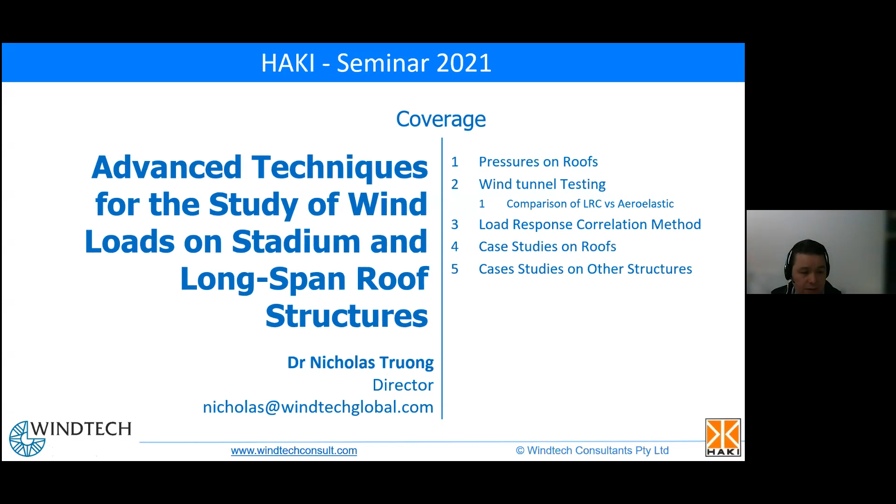All right, let's go. Sorry, that's the slide. Okay.

Okay, so pressures on roof structures. The main thing about roof structures is they can be quite complicated in terms of the pressure distribution. And one thing is that the roof pressures will fluctuate over time. This is really the reason that we need to spend a lot of time doing specialized testing using the wind tunnel.

Sorry, this is just what I was saying there. So let me move this.

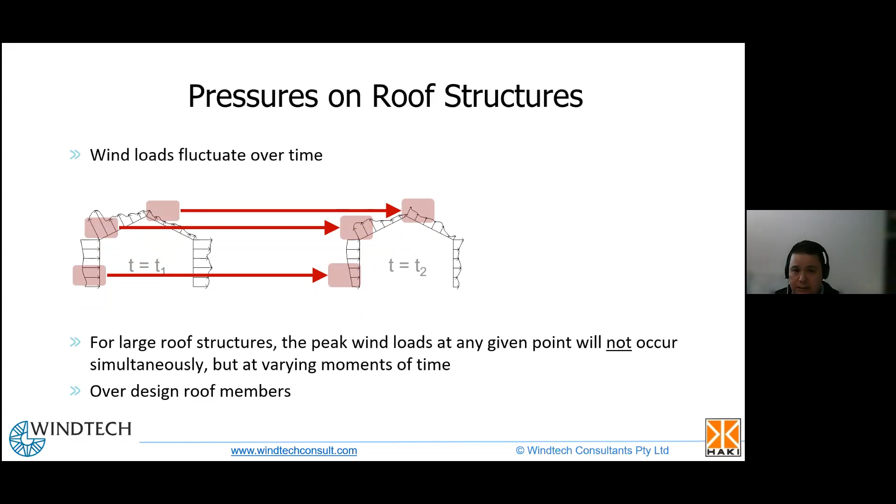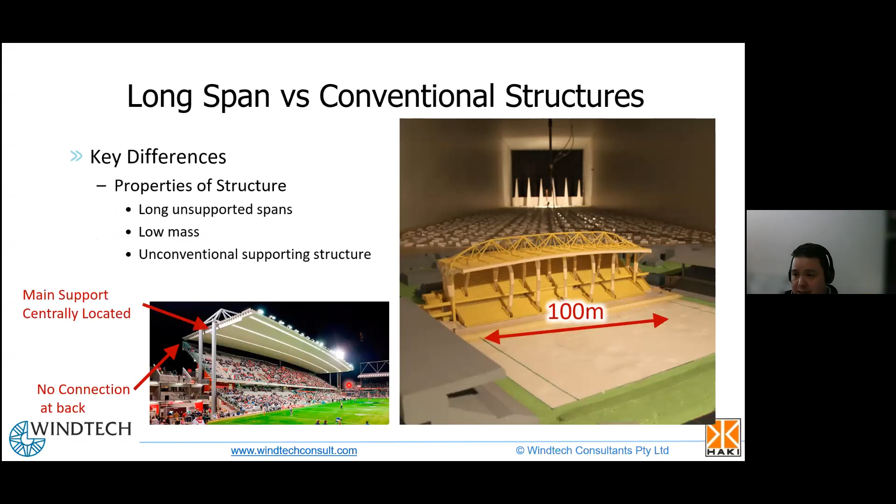In particular, this roof has only got a single main centrally supported structure here. You can see there's 2 pylons, linked up to this truss structure across the top that supports the roof. So unusually for a stadium, there's no back connection here. What this means is that the structural response of this building is quite different because we don't have a typical cantilevered roof.

And in particular, for this structure, prior to our involvement in the testing, there was a small failure, and the failure occurred at one of these joints here. This happened because the original designer of this building used a standard approach, and the standard approach doesn't include some of these interesting structural responses.

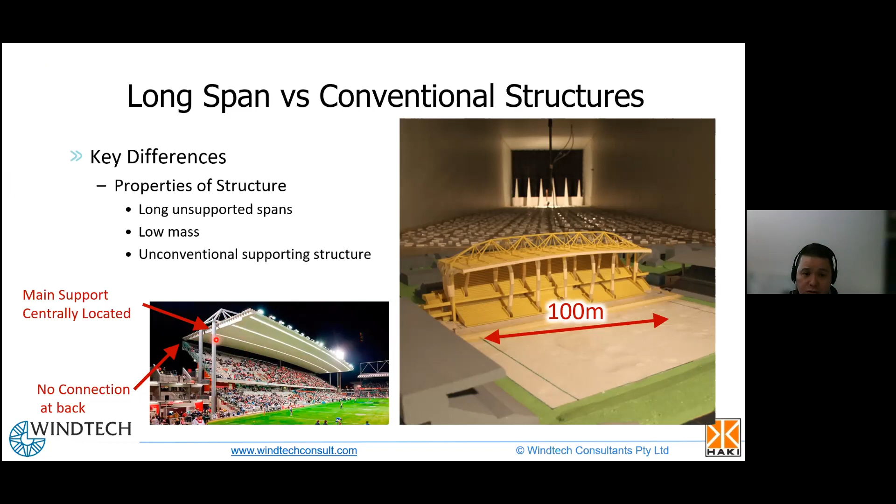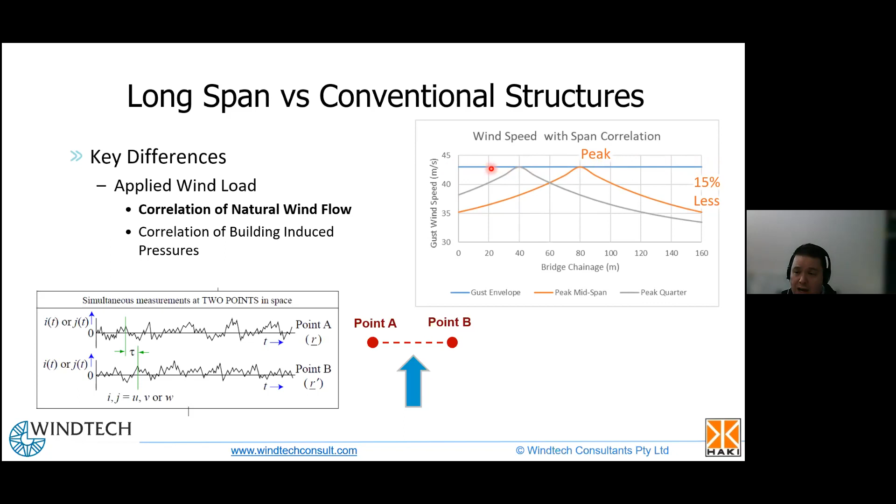So in this example here, we can see that if we use the gust envelope, which is the blue line, to design the structure, we would design the structure for about 43 meters per second. Now, the 43 meters per second represents the peak wind speed that occurs along, say, the bridge in this case. If we then account for the lack of correlation, we can come up with some different wind speed distributions. I've given 2 different distributions here, and this is based on an exponential decay in the correlation length.

So what we see here is that when the peak gust occurs at this point, using some statistical methods, we can estimate what the most likely wind speeds are further away. This will give a different wind speed distribution, and that means that your overall structure will experience a lower load. This is one of the things that we can pick up using wind tunnel testing.

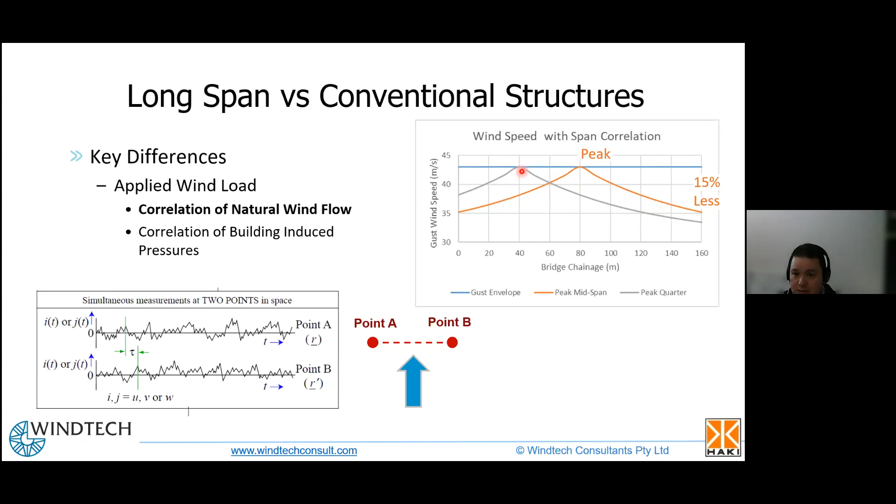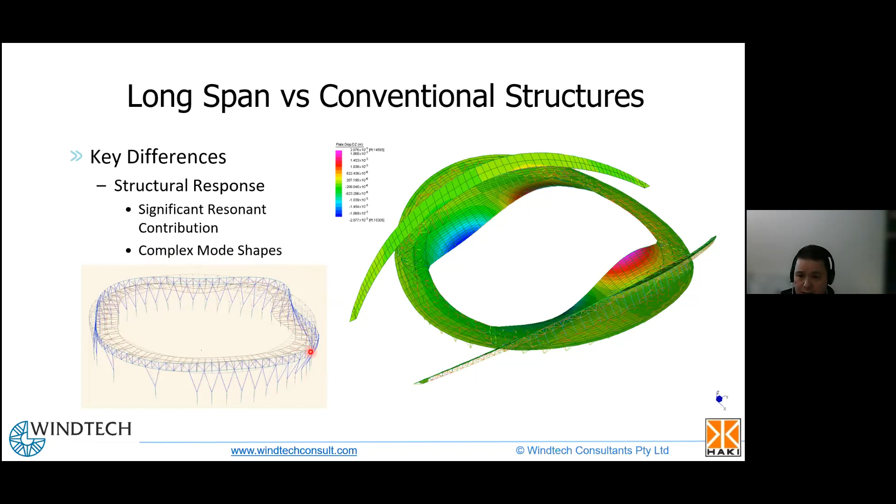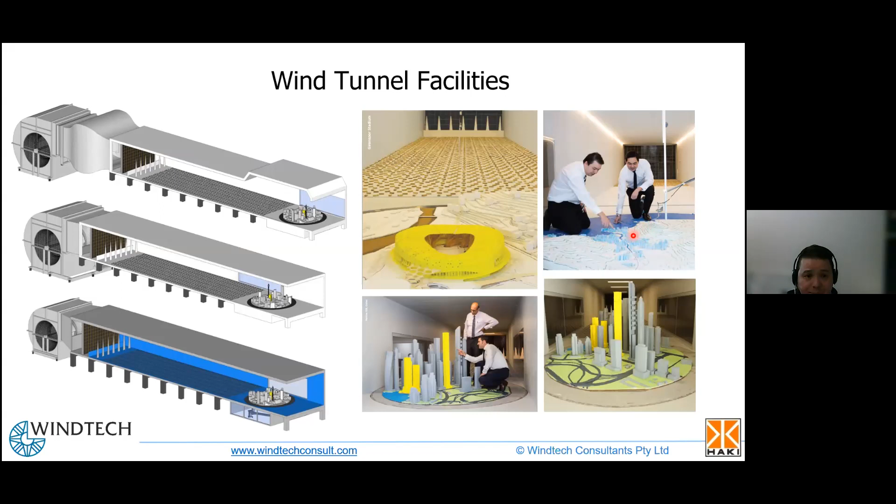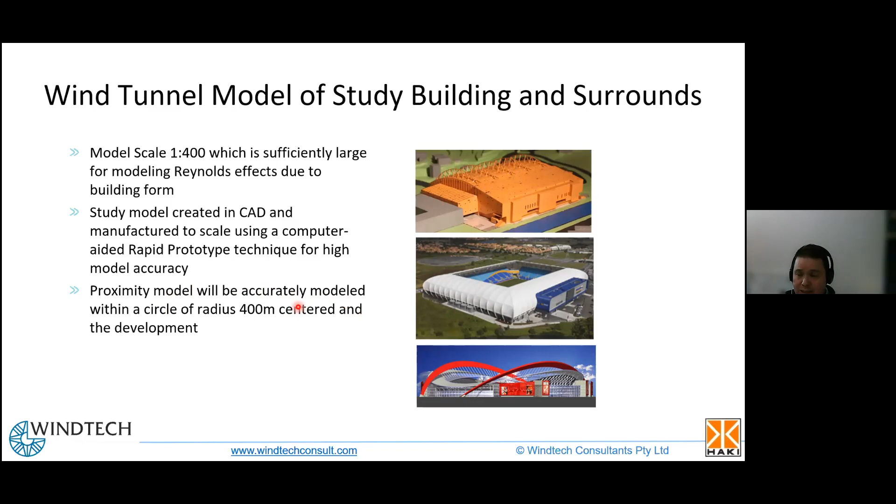So in wind tunnel modeling, we use a scale model. So typically we would use a scale model in the order of 1 to 300 to 1 to 400. And that's normally sufficiently large to have a good Reynolds number. All of our models are using computer-aided design, and we use 3D printing. So this is quite a complicated model here that's been 3D printed, and that allows us to get all the shapes in and all the different curves. And then typically you would include a radius of between 300 and 500 meters around the development of all of the surrounding buildings.

One question that quite often comes up is a comparison between the aeroelastic method and the LRC method. So the traditional approach is the aeroelastic method. This is an example here. And in this method, the model moves. So the idea is that you build a stadium roof, for example, this one here, and you try and replicate the actual mode shapes and scaled masses and scaled damping of the roof. Now, this is a very complicated process because it requires a lot of engineering work to actually design the model correctly. And then what happens is you put the model in the wind tunnel, you take some measurements of the displacements of the roof, and then you translate that to the real building.

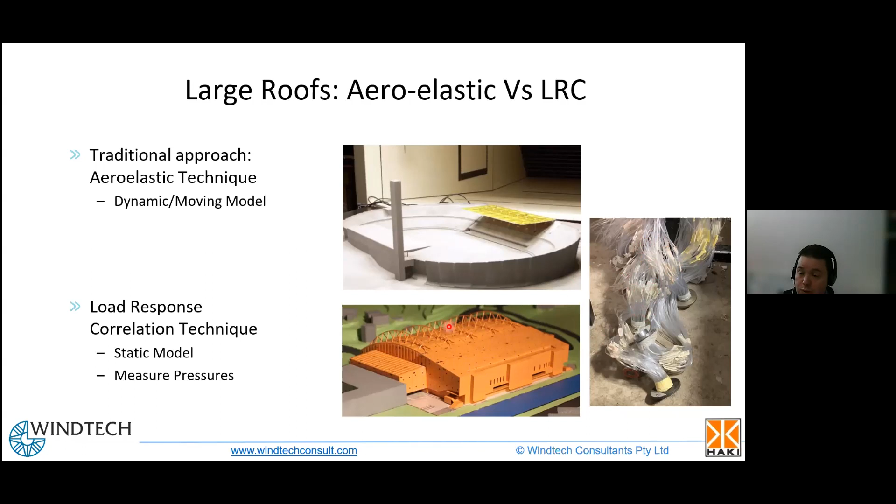Whereas what I'm going to talk about today is a load response correlation method. In that method, we use a static model, like you can see here, and it doesn't move. But what we do is we measure the applied wind load. And the applied wind load is measured using all these pressure sensors, and you can see they're underneath these dots, and they're connected to these pressure tubes, which are then connected underneath the wind tunnel. And using this method, we mathematically account for the movement.

So here are some other points about the aeroelastic method, which I've covered. It can be expensive and time consuming for it to take place. It can be difficult to build a model. But importantly, if the structural properties change significantly, you have to rebuild and then retest the model. So if you want to have an iterative design process, it's very difficult to do that with an aeroelastic model.

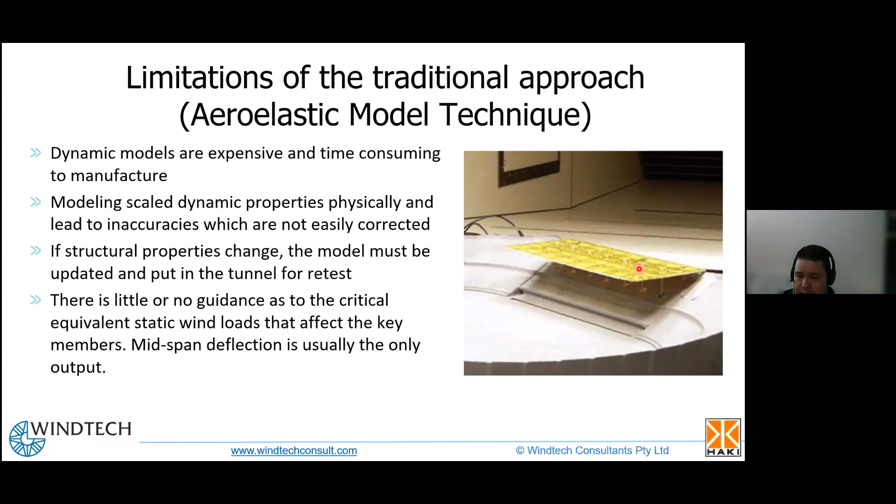With the LRC model, or direct load effects method, we overcome some of those problems. Now, one of the reasons that this method wasn't used historically was it's far more intensive with the computer processing, but now obviously that's a lot easier than it used to be. It also accurately accounts for the lack of correlation of the peak pressures, which we'll discuss. It does need a little bit more information from the structural engineer in terms of some influence coefficients. So this is a little bit more work in the beginning.

However, the real difference with this method is it provides a set of equivalent static wind loads. So instead of giving just one deflection or a couple of deflections of the roof, in this method you will receive a series of pressure distributions. So you might receive 20 or 30 or 50 pressure distributions, and these pressure distributions are designed to maximize the pressure or the response at different areas.

So in this example up here, you might have a pressure distribution which maximizes the deflection of the roof here, and you might have another pressure distribution which maximizes the drag acting in this direction. And they're all separate pressure distributions, and they allow you to accurately design all the different members instead of just using a single displacement or something like that.

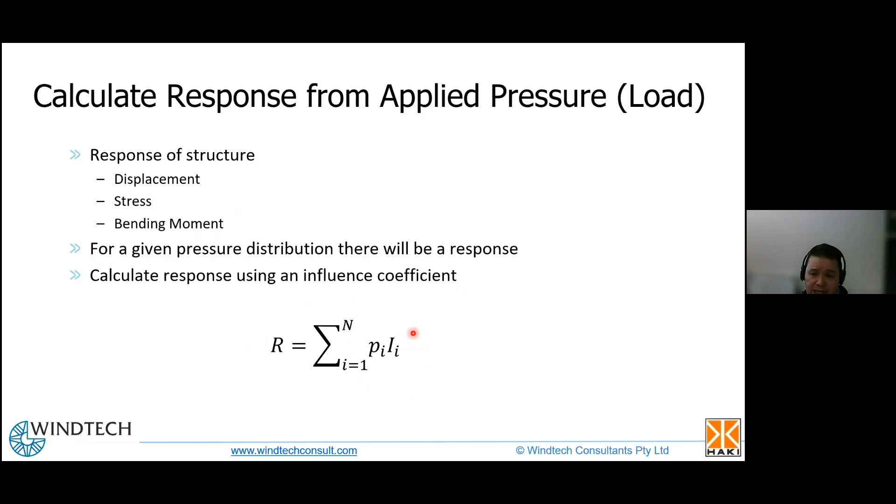And so every time you apply a pressure to your model, there will be a small change. And we capture that change by using influence coefficients. And as I said, you assume that there's a linear relationship between them, and then you just sum over all of the different pressures. And I'll explain how we do that.

Okay, so the first step is to create a link between the applied pressure, which is the load in the load correlation method, and the response. And to do that, we use an influence coefficient, and I'll show you how we do that.

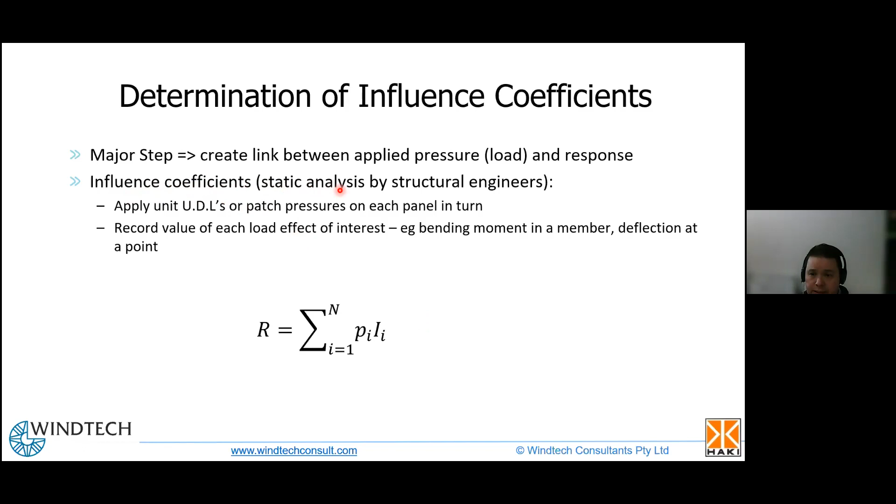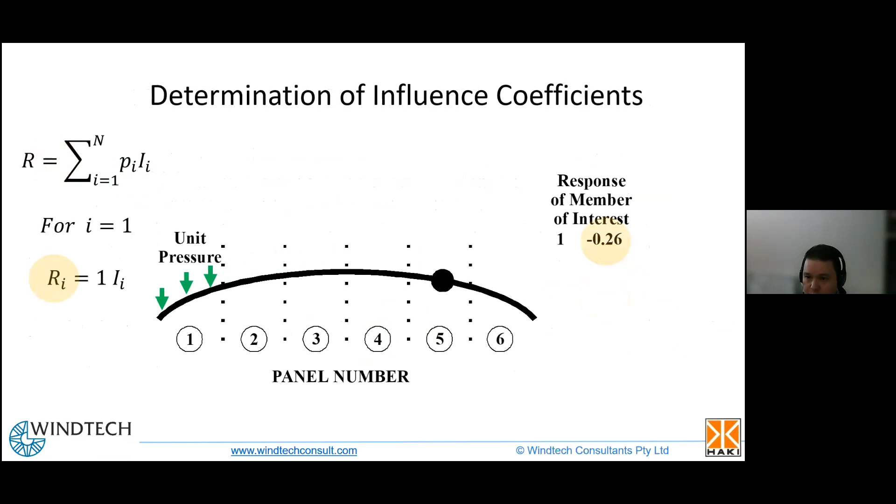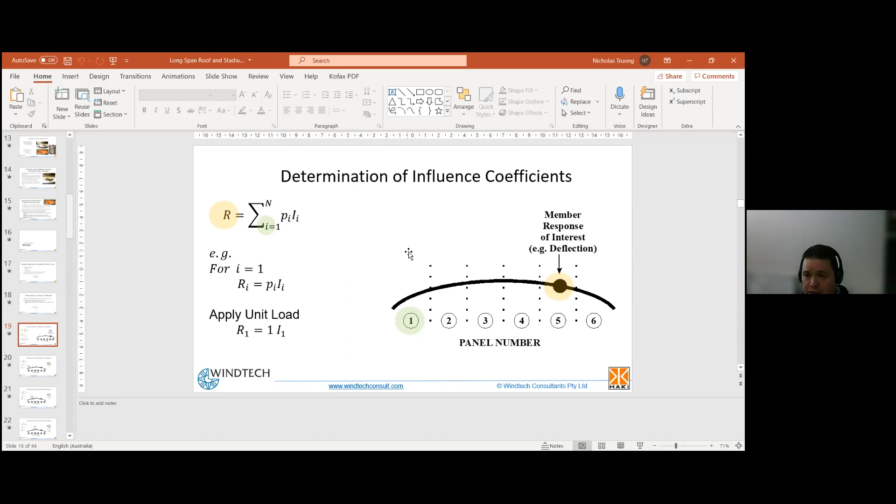So you can see here, I've got a roof here and it's in 6 parts: 1, 2, 3, 4, 5, 6. And the interest in this part is the deflection. So that's the deflection here. So what we're saying here is that we have a response, a pressure, and an influence. So to start with, we look at point 1 and we say, what happens if I apply a pressure at point 1? And then what is that effect on the deflection there?

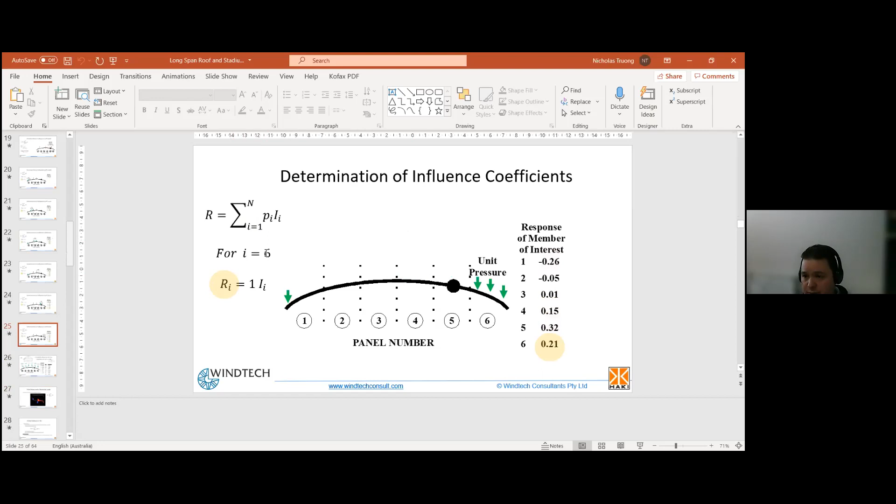So going through this, you'll see what we do is we apply a unit pressure here, and then in the member of interest here, we measure a response. And we go through that slowly, and we have all of these series of responses for the different I values. Okay. Let's go back to the full mode.

And at the end of that, we can use these measured influences together with an assumed pressure distribution to calculate a response. So in this example, I've looked at a standard here for a domed roof, and you can see that typically you'd have a positive pressure at the leading edge, you have a strong negative pressure at the top where the flow separates, and then it sort of weakens as you go down the back end of the dome.

And so I've just looked at that and estimated the pressure distribution, and you can see it's stronger at the top and a positive at the front, and it sums up to that response. And so that's basically the heart of the method. And this animation really just shows you that again in practice.

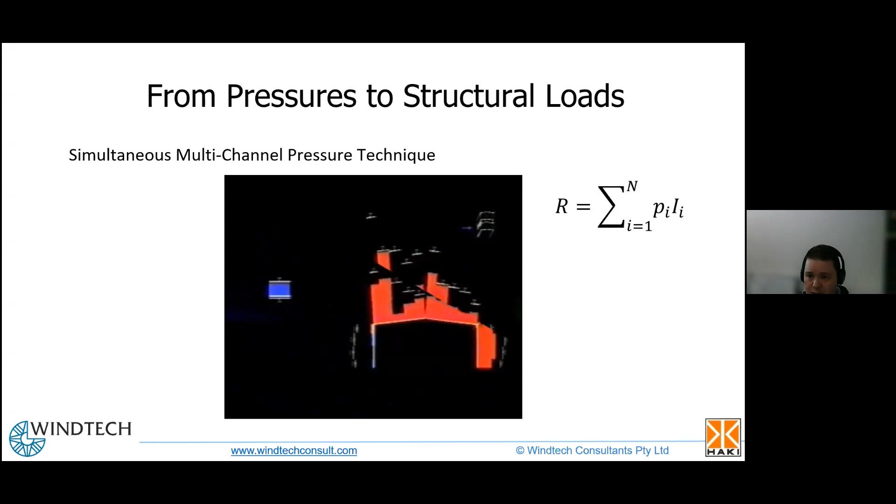So all this is showing here is it's looking at the bending moment, and that's the bending moment value there. And what this animation is showing is that as the different pressure distribution moves around, you get different values of the bending moment. And these lines here represent the peak values. So this animation is from Michael Kasperski, who came up with the method. And in the second part of the animation, we're looking at the same idea again, but we're looking at the bending moment on the back side.

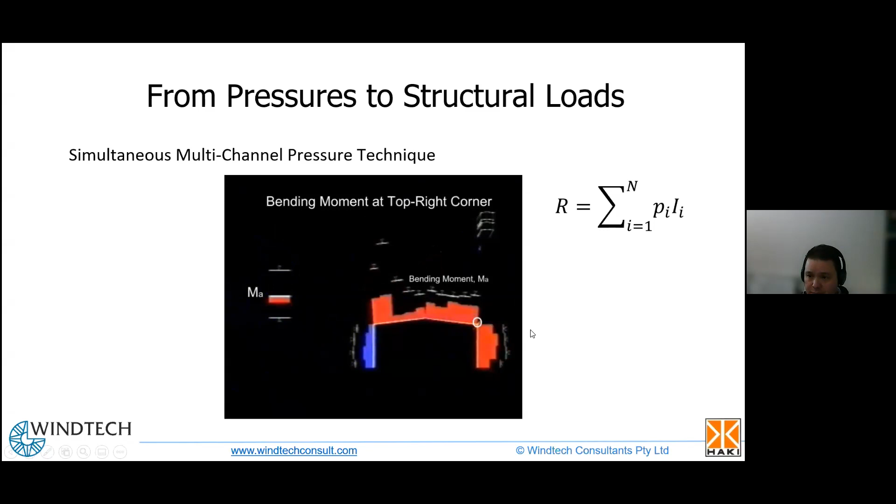Okay, so another method that you can use is called the direct method. So the direct method is quite similar. The direct method also uses the pressure distribution and the influence coefficient. So once the influence coefficient is determined, if you have the time series of the pressure, just like what we saw before, you can then work out what the response is for every time, and then you can just take the maximum of that R value, the response, to work out what the maximum response is.

But the key question then is, which pressure distribution caused this response value? Is it just the pressure distribution which happens to occur at the same time? Or what happens if you have a response that is 2% less than the maximum, but has a completely different pressure distribution? How do I account for that? So this is the key difference between the direct method and the LRC method: the LRC method predicts the statistically most likely pressure distribution to cause the response.

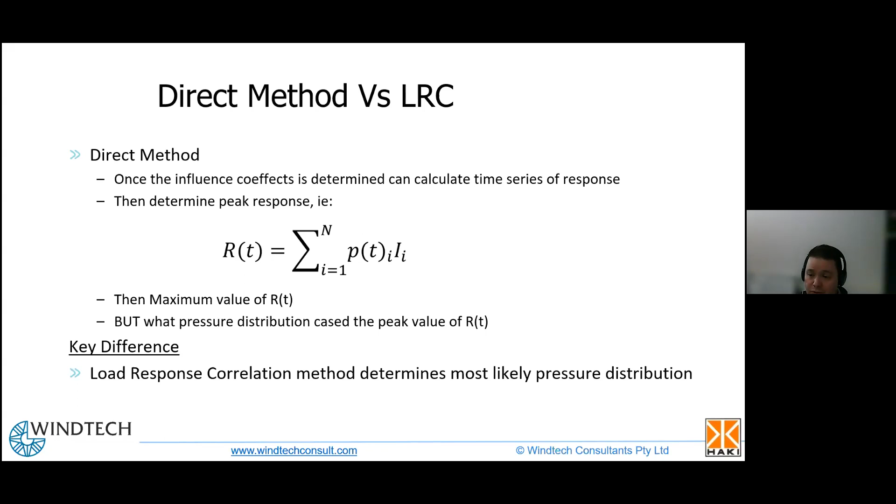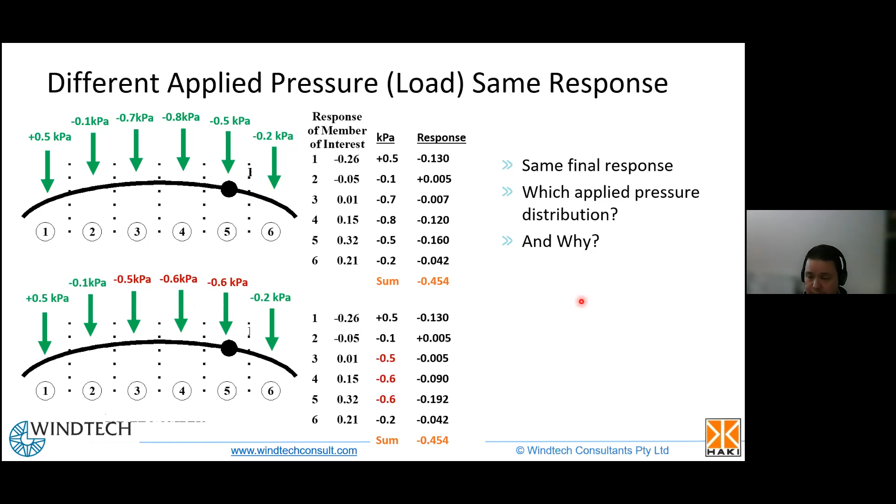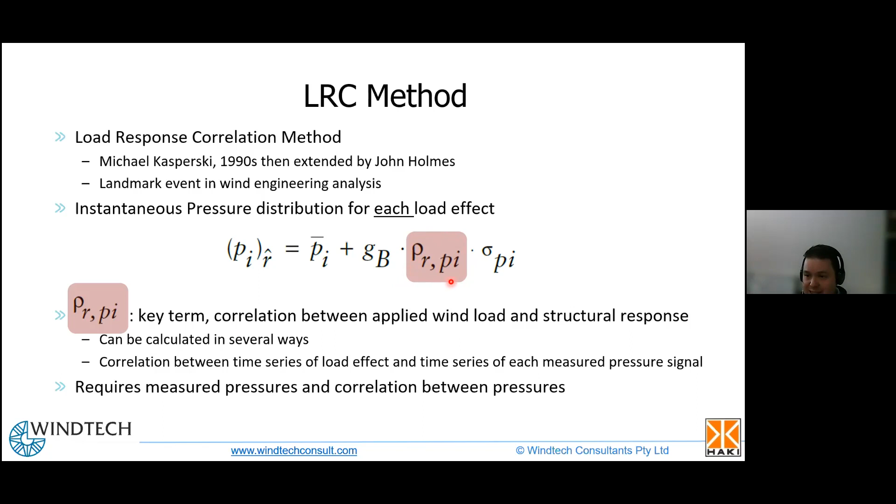So I'll provide you an example of correlation just to give you a bit of a feel for what I'm talking about. So this is this roof that we saw earlier. I'm going to look at the correlation coefficient, which is between some sensors. So this sensor here in the middle and other sensors for two different wind directions.

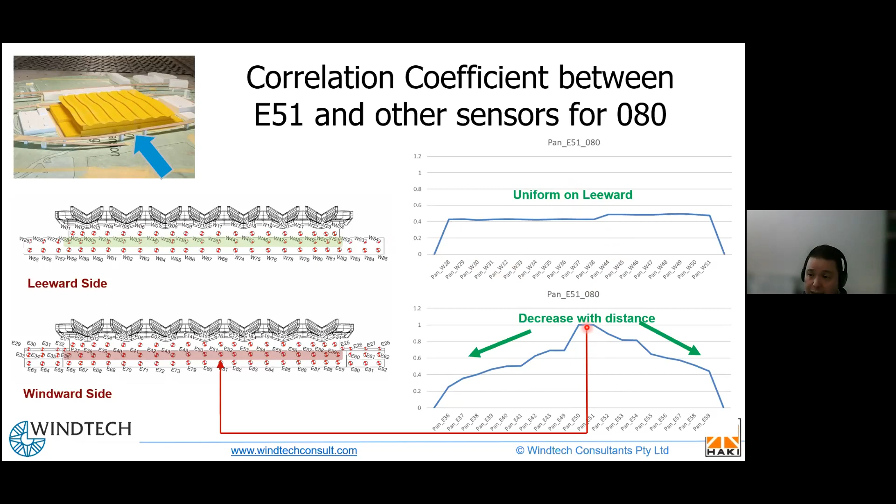Although it's still uniform, there's a slight increase in the peak pressures on the backside compared with the front, which is an interesting effect. So this is the kind of thing that we can see in the wind tunnel, and this is why it's important to use these correlation methods. So I hope this short example has shown you why we should consider correlation.

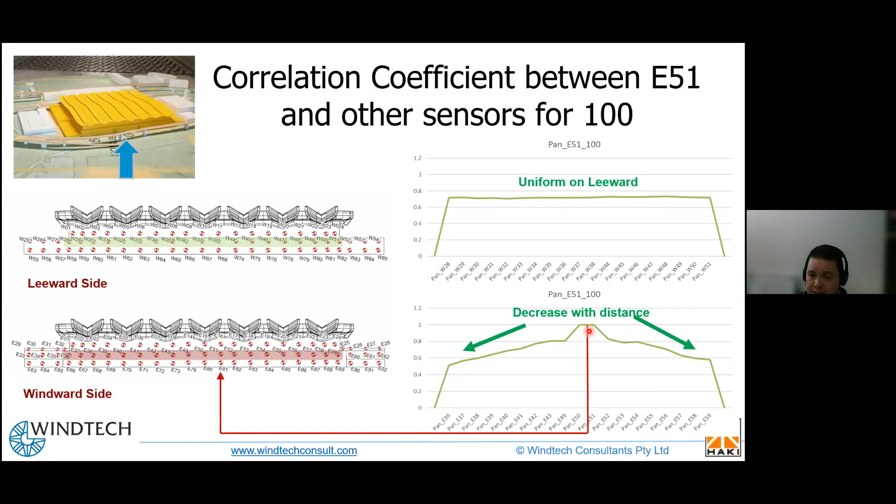So I'm going to go and show you now some different examples. So the first example I'm going to show is for this stadium in New Zealand. So this stadium is in the South Island of New Zealand, in Otago, and it was built for the Rugby World Cup. And you can see this building has a bit of topography around it,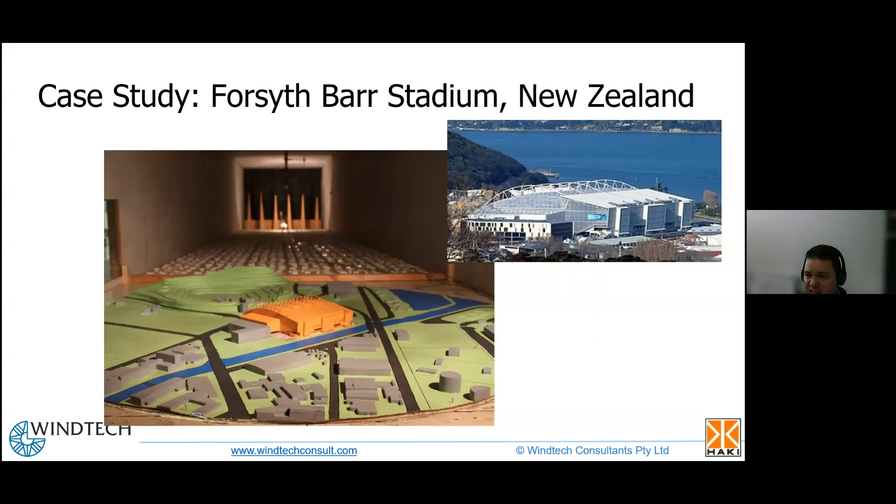and it's also got an interesting curved roof. So this is the building in the wind tunnel, and this is the completed building here. So this building has what at the time was quite unusual, which is a PTFE roof, which was clear.

So these have become more popular in recent time, but this is one of the early uses of this technology, and it has a series of pillows, what they call pillows, in here. So the idea, I'll just show you the next picture. The idea is that the light can come through the roof and it lets the grass grow. And so you can play the rugby not in the rain, but the grass can still grow.

So this would be almost impossible to model using the aeroelastic method, because you would have to have modeled the interaction between the structural members and the PTFE. And that would be quite difficult to model at scale. So one issue is that when you make the aeroelastic models you need to make everything smaller. And one practical issue you have with a lot of wind tunnel models is that it can be quite difficult to make everything small and fit together.

So that's one great advantage of the 3D printing, which you can see here. The 3D printing has allowed us to build these intricate structures. So when I first started in wind engineering, we had to build these models by hand, and we would glue these together, little pieces of wood together, to represent this. Now, you can imagine that's quite difficult for this. So that's one advantage of 3D printing. And you can then imagine having to go on to make a complicated aeroelastic model.

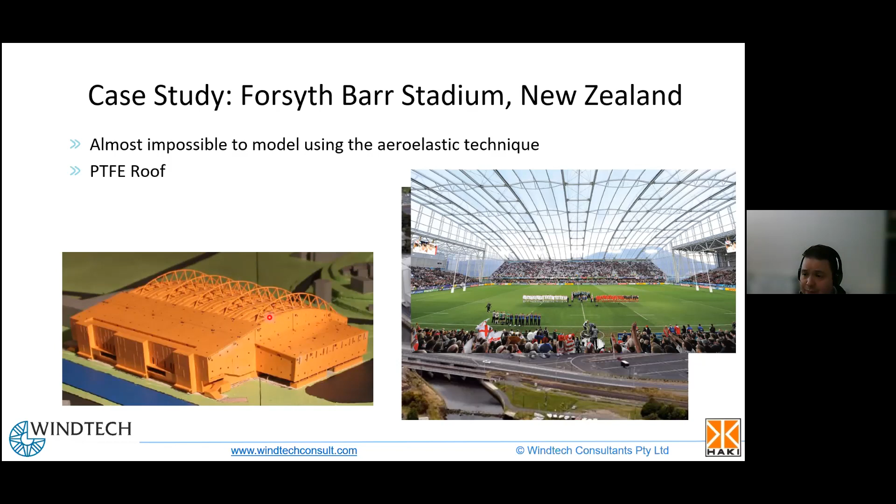Okay. So in this example here, you can see that we've divided the structure up into panels. So as I showed in the dome example, everything is based on panels. So each panel has to have a series of pressure sensors. That's what these are. These dots represent the pressure sensors. So for example, here we use 570 pressure taps, and we have 106 areas.

Now it's very important that if you're looking at one of these layouts, that you have at least 2 sensors, if not 3 or 4 sensors per panel, so that each of the pressures truly represent the pressure on the panel. If you only have one pressure sensor, for example, in the middle here and the middle here, the pressure only represents that single location, not the panel. So that's why it's very important that you have multiple taps per panel.

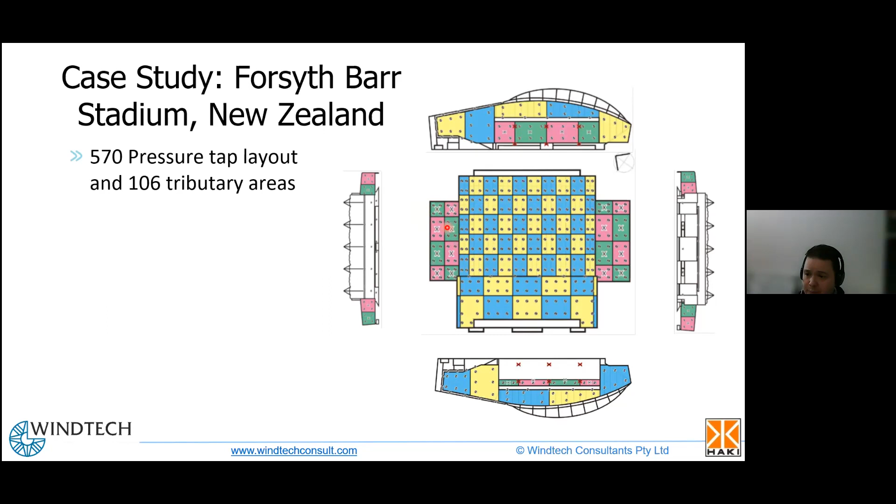We also have sensors on the back side, and that's what these X's represent. So we could measure the internal pressure as well. And that's one other advantage of using a static model. So in this case, there were openings, and obviously the grass needs ventilation. So there were openings all along here, all through here, and there's also openings underneath to allow the fresh air to move through this. So if you wanted to do this with an aeroelastic model or another physical model, you would need to adjust the internal volume of the model.

And to do that, what you typically do is that you build another box actually underneath the model, and we expand the volume. So what's mathematically demonstrated is that wind tunnel models need to have an expanded volume compared to full scale models to correctly capture the internal pressure fluctuations. Whereas when we do this method using the pressure sensors, we measure all of the wind speed, the pressures at all these locations, and then we mathematically calculate the internal pressures.

And so for large roofs, internal pressures are very important. I haven't included it here, but we've done a lot of work with aircraft hangars, and as you probably know, aircraft hangars have large doors to let the planes in. And so you'll get very different pressure distributions when the doors for a large hangar are open compared to when they're shut. And that's something that we can capture.

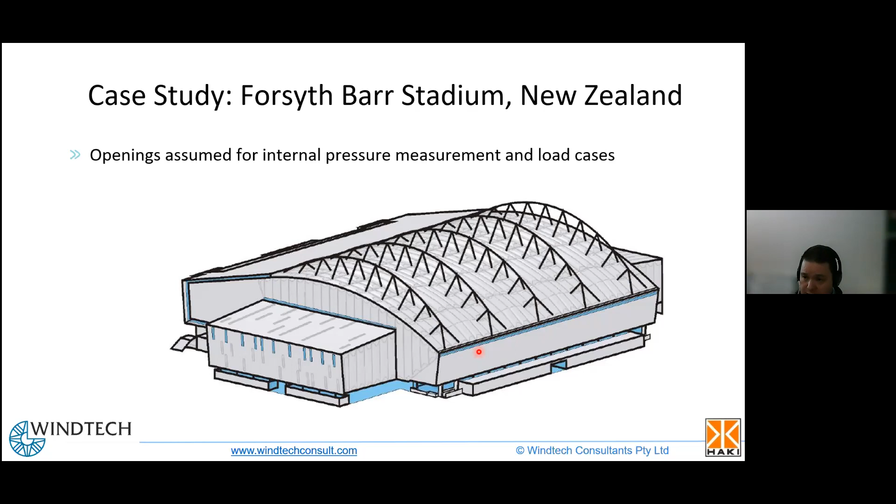The rooftop deflections are always important. Sometimes you may also have a deflection on some of the edges, depending on how your structure is designed. The stresses in critical members, I mean, most designers will know which particular members they're most worried about. Quite often there's shear in the joints that you might be interested in. And then finally, there's the base reactions at the base of the supporting structure. So this is all very, very typical.

Now, for this particular stadium, they were concerned about the resonant response. So the basic LRC method, as derived by Michael Kasperski, does not include the resonant response. The subsequent work by John Holmes then added in the resonant response. And so this allows for the amplification of the structure to amplify the dynamic response. Now, we would typically only recommend performing that if the first mode is less than 0.8 hertz.

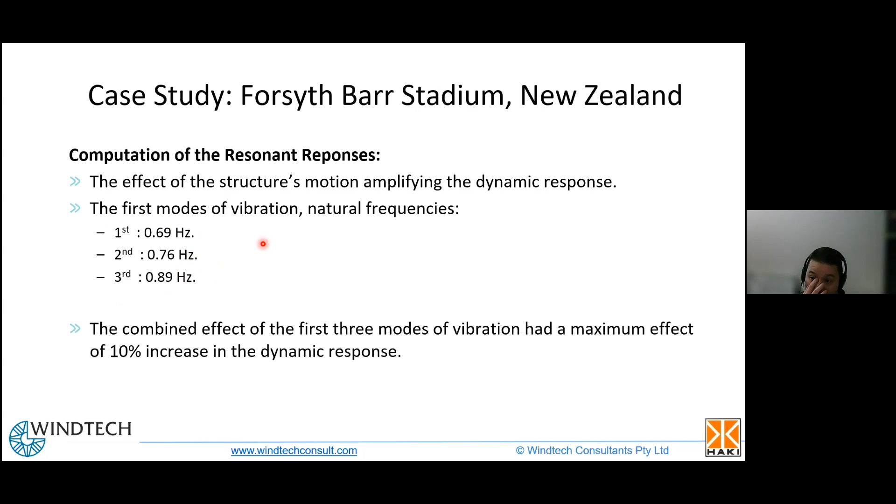Now, for this example, we considered these 3 modes. So there's 0.7, 0.76, and 0.89 hertz. If there'd only been one mode, perhaps if that was the first mode, perhaps we wouldn't have included it. But once you do one, you may as well include 3 or 4. It's the same amount of work, and it'll capture all of those effects. And so what we found was that the combined effect of the first 3 modes had the maximum of increasing it by 10%. And that's a maximum of 10%.

So you can see here in this load effect 3, which is the reaction force of the node, the change that it had. So the background is the dashed line, and then the solid line is the resonant response. So the background response is the response of the structure to the mean wind speed, so that's the mean here, as well as the slowly varying pressure fluctuations. So you can see that's what has occurred here. And then the resonant response is just added on. So the resonant response is just this small amount here.

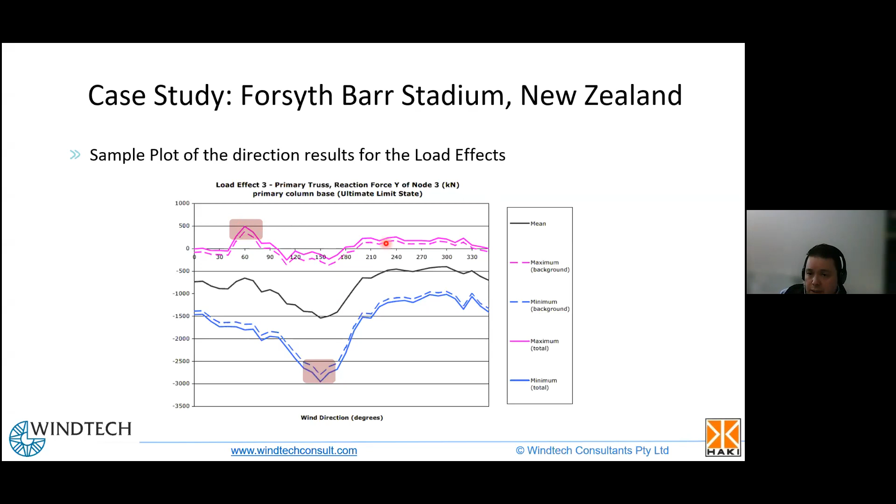This is another example where you can once again see the resonant response. And so this is fairly typical for critical members, so that you might have a 5 or 10% increase.

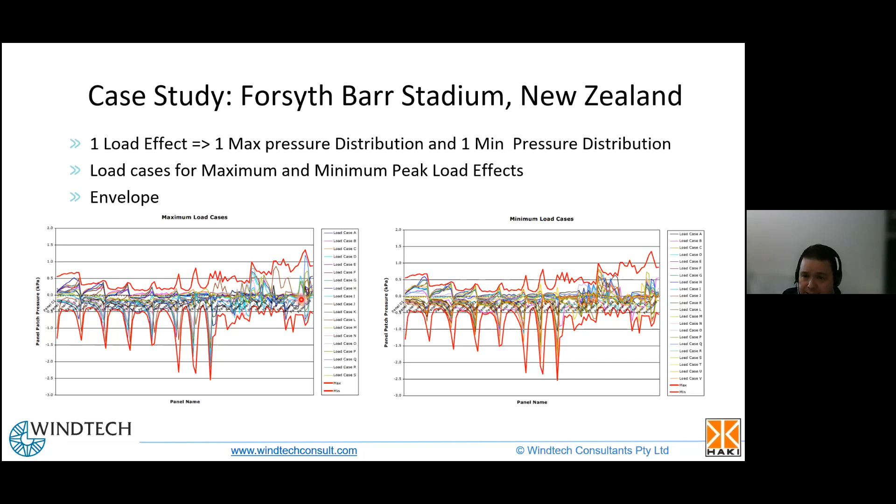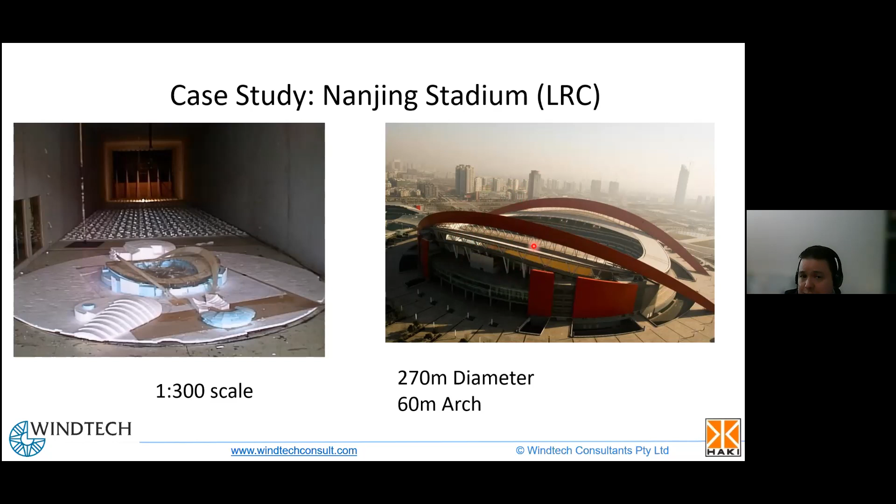So for this study, we instrumented it with 512 sensors, and we used 64 panels, and the panels covered both the main stadium roof through here, as well as that interesting architectural feature on top. For this one, we also included the resonant effect. As I mentioned earlier, there's a lot of interesting mode shapes occurring with this one here.

You've got these two here, and they're moving in the same direction, and these are in the opposite. And then you've got the next case over here where this is going up and down and up and down. So this is like the opposite of this case. And then you have a more predictable mode shape when everything's going up at the same time. And then you have the anti-symmetric case when one's going up and one's going down. So these are all relatively expected mode shapes, but we really need to account for them.

You can also see, interestingly, how closely spaced they are. So these are all within 0.05 hertz of each other. That is actually quite unusual in our experience. Typically, you would see those modes being a little bit more separated. And I would have expected that these two first order mode shapes would have had a slightly lower frequency than the second order mode shapes. And that is slightly unusual.

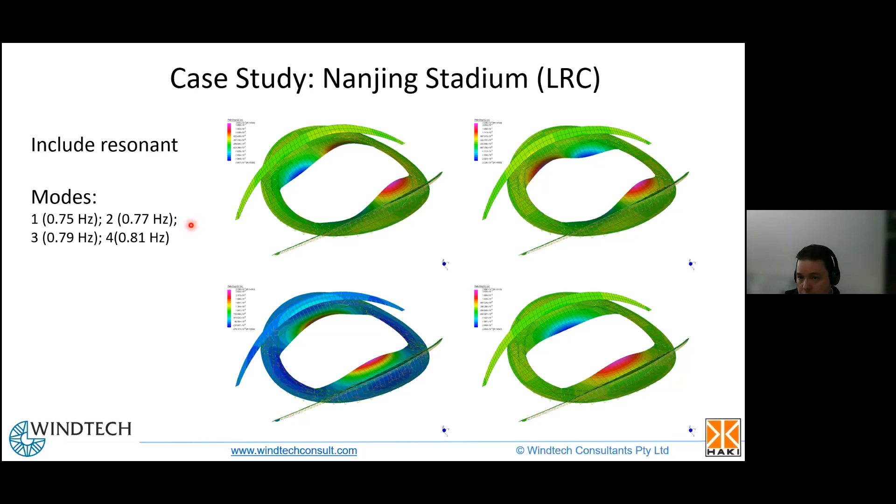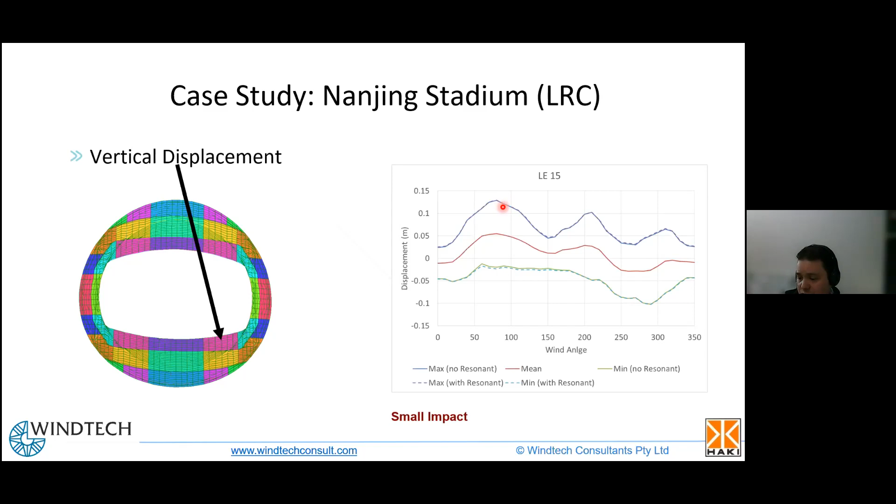And because it's a retrofit, the sail structure is sort of self-contained. So we were only interested in working out the pressure distributions on the top side, and you can see here. Let's see what's happened here. So this stadium had some very complicated mode shapes. What we can see here with the mode shapes is that there's some small deflections here, but really it's these odd sort of mode shapes that are occurring all around the building. And these are just some of the mode shapes that we looked at.

As you can imagine, this sort of wiggling circle effect occurred all around the building. So there's a lot of mode shapes that look very similar. Basically, you can see there's a large deflection here for this mode shape and a large deflection here for this mode shape. This kind of pattern repeated itself all around the building. So the effect of that later on was that because each of these mode shapes is actually quite isolated to one region, when we looked at the resonant effect, we could see that effect. So that's actually something quite interesting. There's a link between the mode shape and the resonant effect about how localized it was.

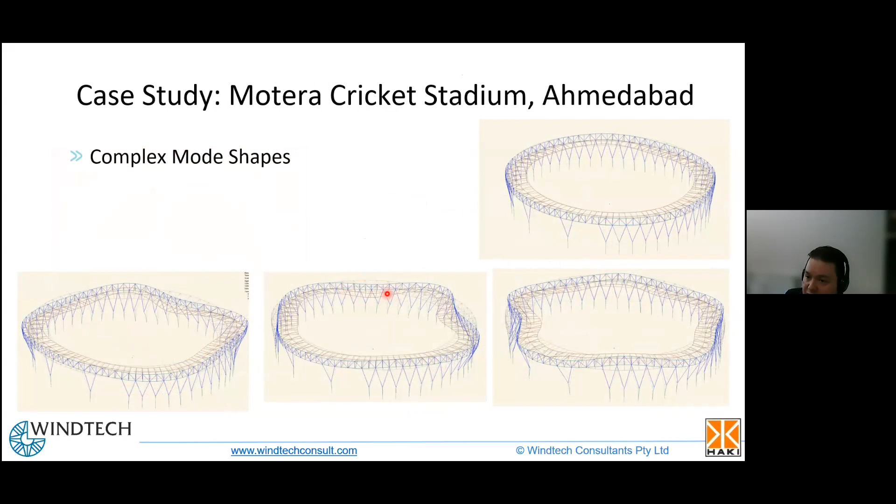So I'll show you this example here. So this example here is the members in this area here. And once again, just to go back again to this here, every area, I mean, I'm not sure if it actually was this area, but you can see localized to every area, there was a large displacement occurring there.

So when we consider the resonant effect, we're also including the correlation, because it's the correlated forces that occur at the areas where there is a strong mode shape deflection, or strong magnitude of the mode shape, that have to work together. So I might just say that again.

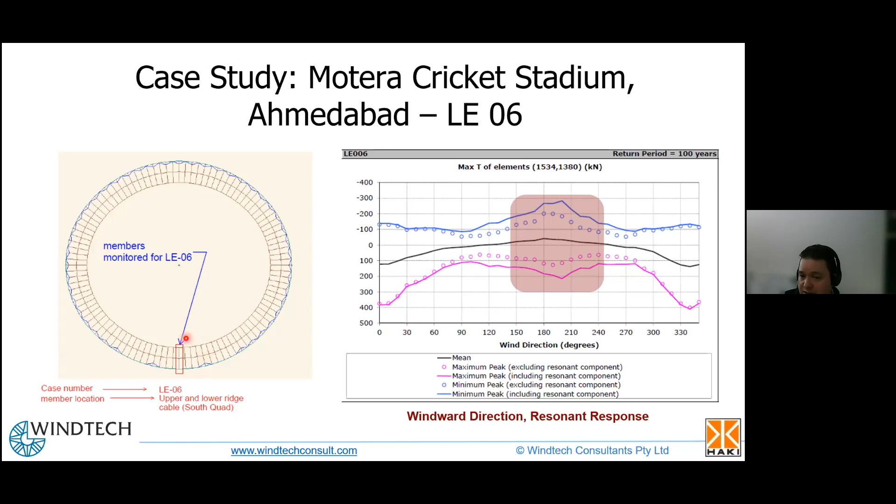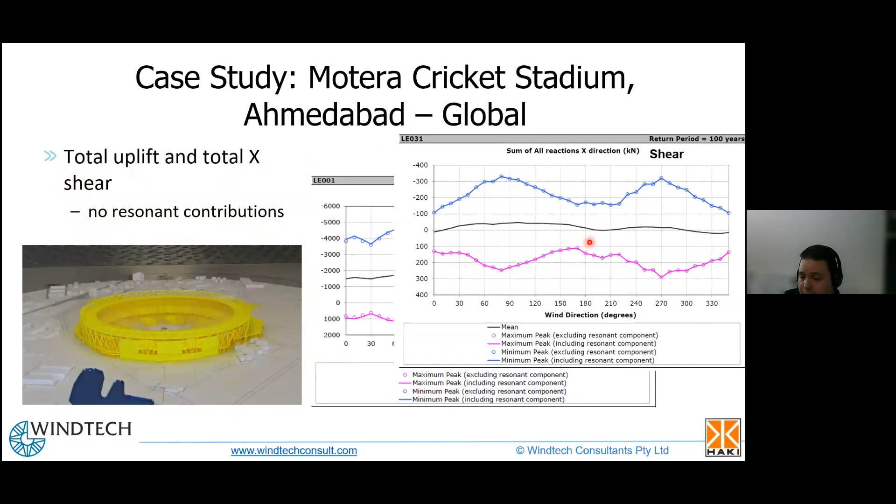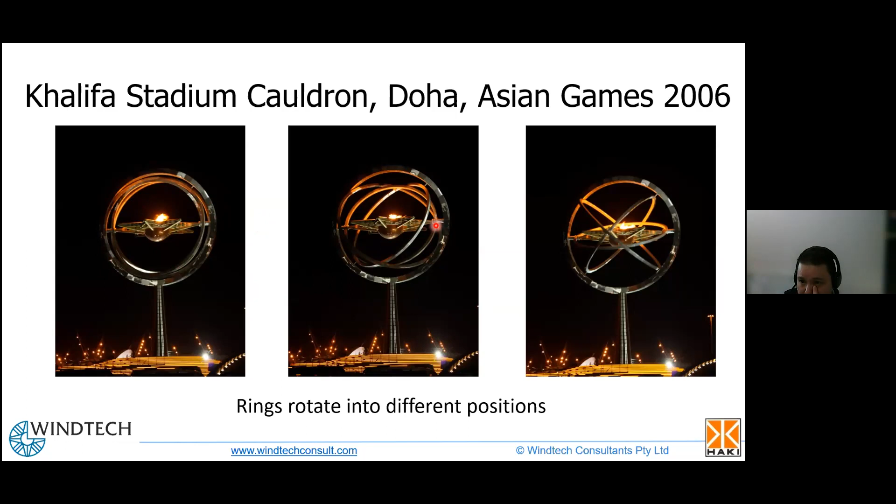Now, in terms of modeling it, it was quite challenging. So we had to model the rings in different positions. So there's the so-called construction mode, and that's when obviously the flame isn't on and it's all flat. And so that's the way it was built and put together. And then there was the rings collapsed operation mode, and that's where the rings return to. And obviously, it's flat with the fire going on, but the rings are like this. And then when it's in operation, we just selected, in consultation with the designer, some representative positions of the rings so that we could look at them.

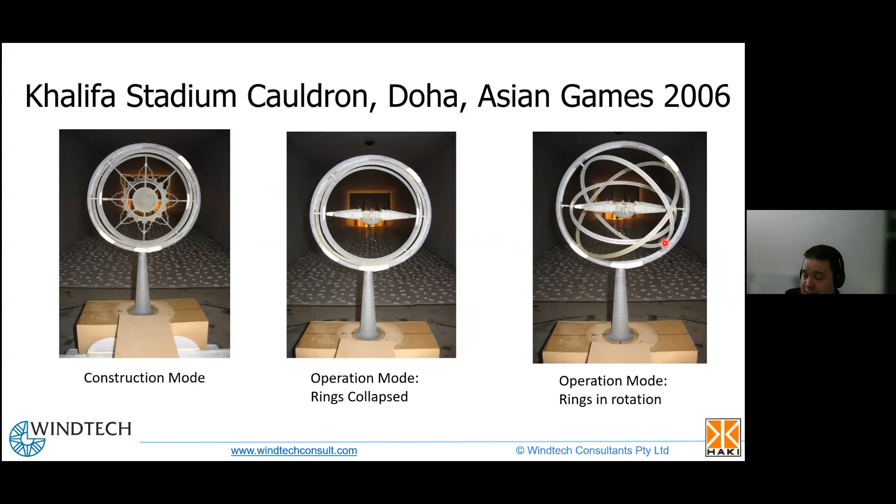Now, this was a very difficult job to instrument, as you can imagine. So what we did is we put pressure sensors into the 3D model. I said that here we've embedded the pressure tubes, but a better way of thinking about this is that when we 3D printed the model, the tubes are actually built in. So there is actually a very small channel running through all of the rings, which are then connected up to the pressure tubes at the bottom. So this is very difficult to do, and it requires a special printing process to get this done.

Now, one of the reasons that the designer was interested in this is that to have the correct effect, the rings need to be quite close together. And so the displacement required was 0.05 meters. Now, in that case, if there's a strong wind load, there's a possibility that it might move the rings around. So obviously there's a lot of vibration going on. There's lots of different forces going on, and they wanted to make sure that if the worst happened and there was a wind gust at a certain point and the thing was moving in a certain way, how much room have they got for the whole scene to make sure that it didn't start scraping when the rings were moving.

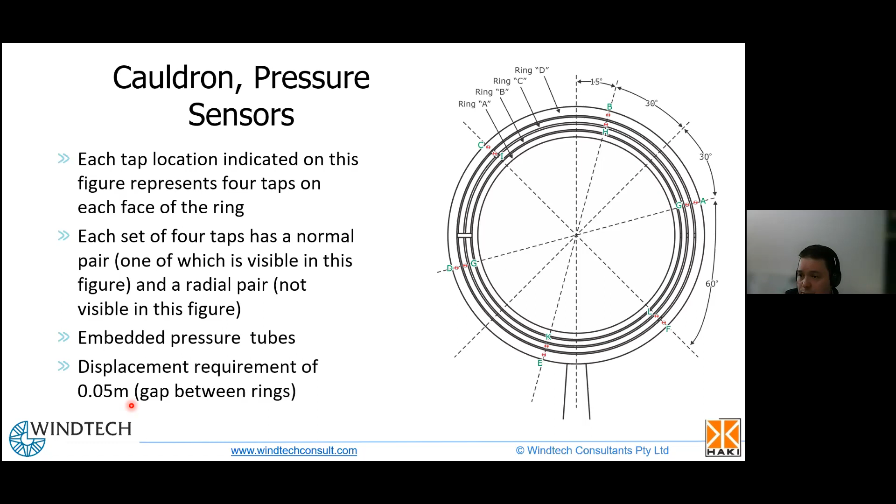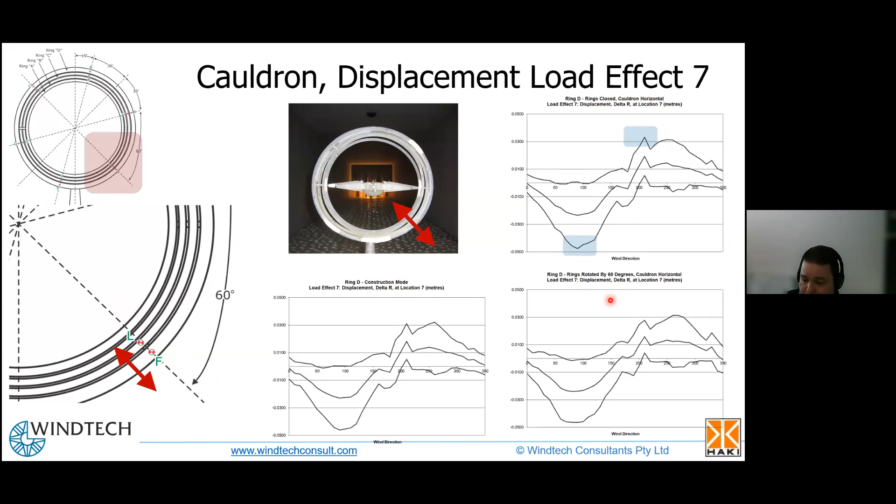So what you can see here is I've zoomed in on the edge here, and what we're looking at is the crosswise displacement in here. So you can see that the pressure sensors are located down here, and we have the displacements in the 3 different configurations. So ring D is the outside ring, if I remember rightly. Yeah, that's the outside ring. And then in the construction mode, in the closed mode, and in the operational mode, we measured the pressures, and then we went on to calculate what the displacements are. And so that effect goes on for several different rings.

And the other thing they were interested in is the torque, the rotational moment of this here. So obviously that's quite tricky to estimate given the shape, and especially also given the rings in a very unusual situation, how much twisting the mast would be susceptible to. So this was for the overall design at the bottom. And here what you can see is that there is a very large effect of the different cases. So this is in the horizontal mode compared to the construction mode. You can see that there's a very large effect because of the different shapes, and that would be very difficult to pick up if you didn't use this method.

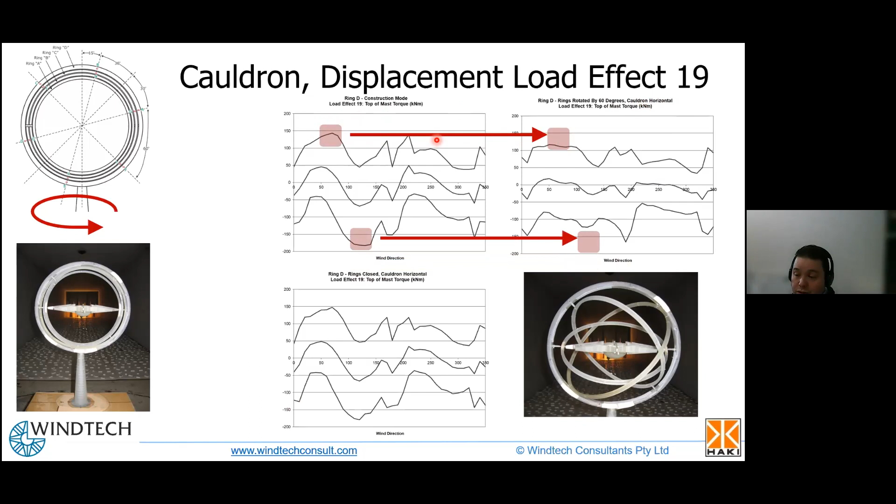Okay, and so my final case I'll talk about is a very unusual metro station in Riyadh. This example really emphasizes the utility of using a 3D printed method along with all the pressure sensors, so that we can capture these really intricate architectural designs. So you can see our wind tunnel model here. This is the rendering, and these are some of the construction photos. I should check actually to see if it's been completed a bit more. But you can see underneath this that there's a very complicated steel frame, and it twists around to try and get this right effect. And then there's glass in the whole thing.

The other important fact, which is a bit tricky to see here, is that it's a train station, and it's actually open through here, so the whole model is open. Although the model is open, the areas that we are designing are enclosed. So there's a hole running through it, but each one of these areas is enclosed in itself. Hopefully that sort of makes sense. This is almost like its own building with a hole running through the middle. And so that's how we were able to model it. And so we followed the same process again.

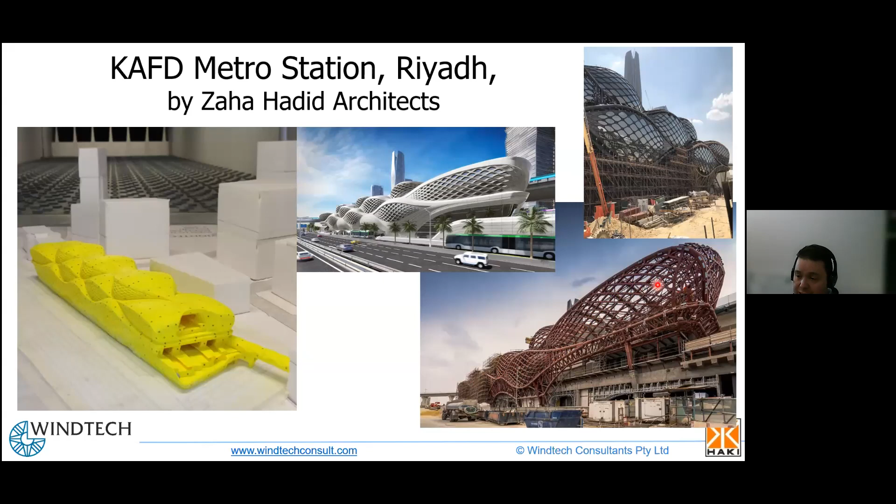And the reason that this was particularly interesting was that it did actually have quite a low natural frequency, which wasn't really expected. You can see here that this has got quite a substantial steel frame underneath it. Yet it did have a low natural frequency for one of the resonant modes of the roof, which is a bit surprising, but nonetheless, that's what it was. And you can see it's also quite well spaced out.

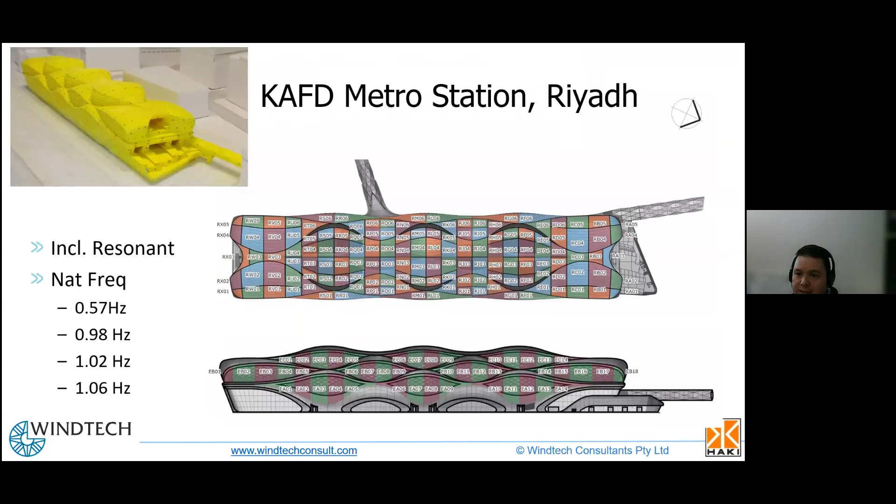In the end, the overall effect of that was quite small, and you can see here that for this roof member that I picked out, which is quite representative, there wasn't a significant resonant response. Why that was the case is always a little bit difficult to understand, but most likely, going back to the original design, because of the very unusual structure, we think that it really broke up the wind flow.

So as opposed to a square building or a rectangular building, which has a long uniform side, it can generate quite strong pressures on the top. Once you have a building with a lot of step ins, step outs, and curves like this, it really breaks up the wind flow. That has the effect of perhaps causing some local areas of high peak pressure. But when you look at the correlation effect, it really drops off that correlation coefficient. So that will then feed onto the wind loads and probably drop the resonant

response. So if, for example, the first mode is the whole roof vibrating up and down, then to get a strong resonant response you need a whole lot of correlated wind loads over the whole roof. Whereas when you have a structure that looks a little bit like this, it will break that up.

Okay, so that was a little bit quicker than I thought, but anyway, I've covered the three different areas, so let me know, or let Nick know, if you have any questions.

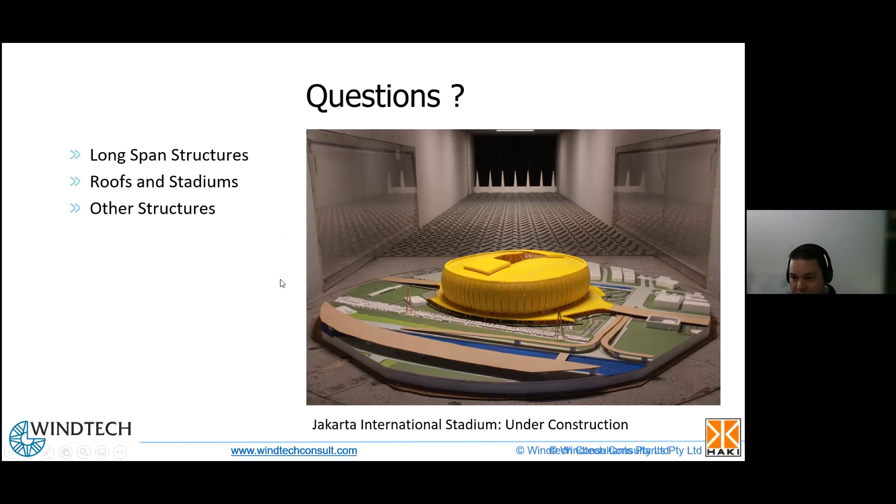A closed roof is a dome, and there are codes available, and the dome roof tends to, the word is, scale correctly. But to explain that, I'll contrast that with what happens with a non-closed roof, because there is a complication with a non-closed roof. I'm just going to see if I can find one for you. Let me find one here, and I'll try and show you what happens.

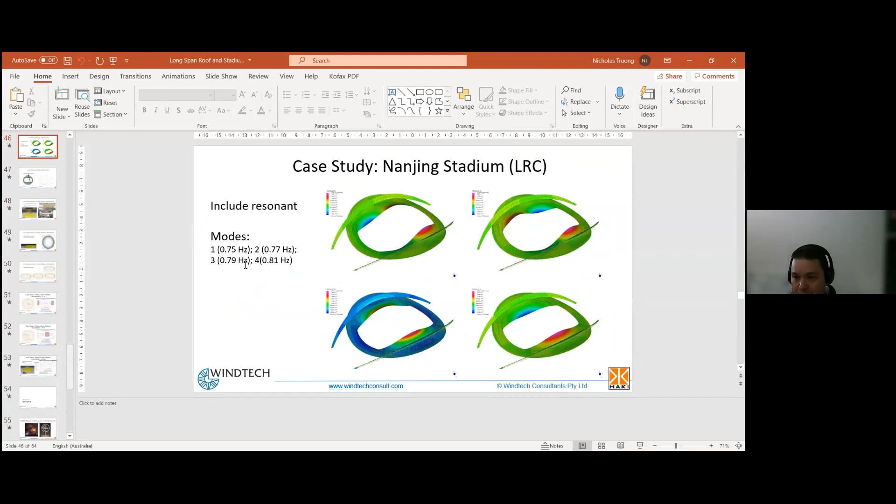Okay, this isn't the greatest example. Typically when you have an open roof, like this size here, you wouldn't expect a lot of effect from this part of the roof on the other part of the roof. However, if you have a case where the gap, say this went out a third of the way and there was a third and there was a third, what happens is that the wind hits this here and it generates a lot of turbulence. And then that turbulence hits the leading edge of the other

here. Sorry, I'll just put this back on. The turbulence hits this leading edge. And so what you can find, depending on the ratio of the height of the building to the gap between them, is quite hard to predict. You get a lot of extra turbulence in there and you get a very large fluctuating load on this lip. And it's actually when the wind comes the other way, when it comes across the stadium.

But this is a round stadium, right? We did one I was thinking about in Turkey, which is an oval. And what happened was that when the wind came along the long axis, there was a lot more turbulence for some reason, and you got a lot of excitation. But when it came across the short axis, it didn't occur.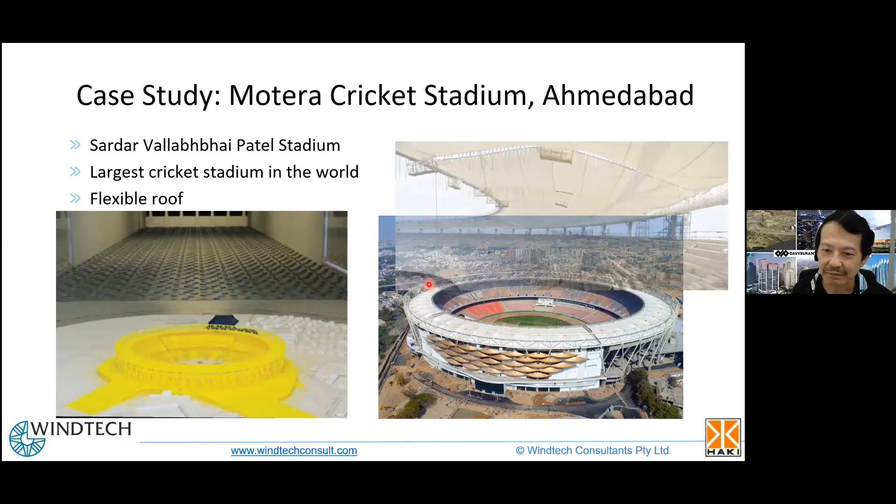Okay, so going back to the Motera Stadium case here, this hole probably has its biggest effect on the internal pressures. But if you're asking when you need to start worrying about the hole, it's a pretty tricky question. I think the bigger the hole, probably the less effect. Yeah, it's a bit tricky to know.

If you have a very small hole, then the effect is going to be more on the internal pressure than on the flow structure I mentioned. Whereas when you have a very large hole, the internal pressures tend to even themselves out more, but you might have that extra fluctuating effect. Having said that, you do have to be a little bit unlucky to get that effect where one side of the stadium hits the other. It doesn't always occur.

Okay. Thank you for that explanation. Thank you.

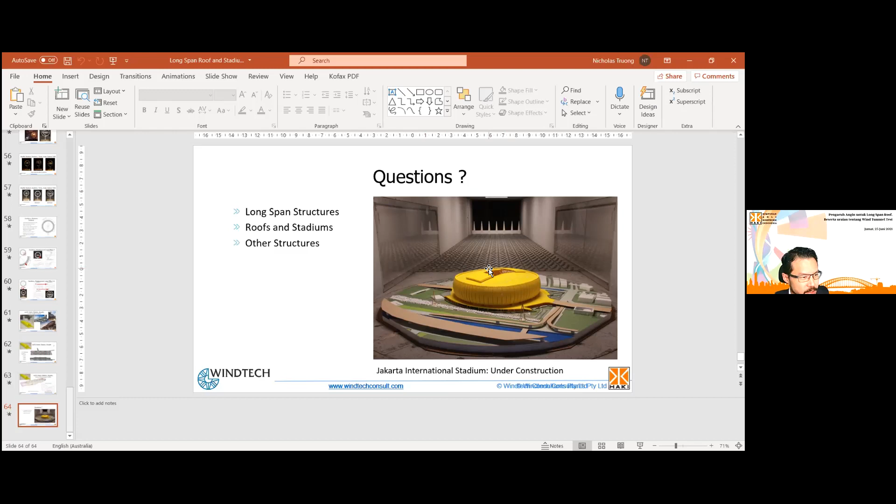Okay, I actually see there's a question here in the Q&A chat. Let me just read it to you, Dr. Nicholas. The first question is by Pak Usman Hassan: could we use LRC to replace the code requirement, or do we have to calculate both and take the conservative one?

And another question, still by Pak Usman, also related: when we do wind tunnel tests for a long span roof structure, how many wind directions are we supposed to consider? For instance, do we need to check every 10 degrees or so?

I'll do the second part first. Typically we would test 36 wind directions, every 10 degrees, on a turntable. The time-consuming part is making the model and instrumenting it. Whether you do 24 wind directions, which some people do, or 36, it's a small amount of time compared to that. Sometimes people want more or less, and you can accommodate that, but I would say the standard would be between 24 and 36 wind directions.

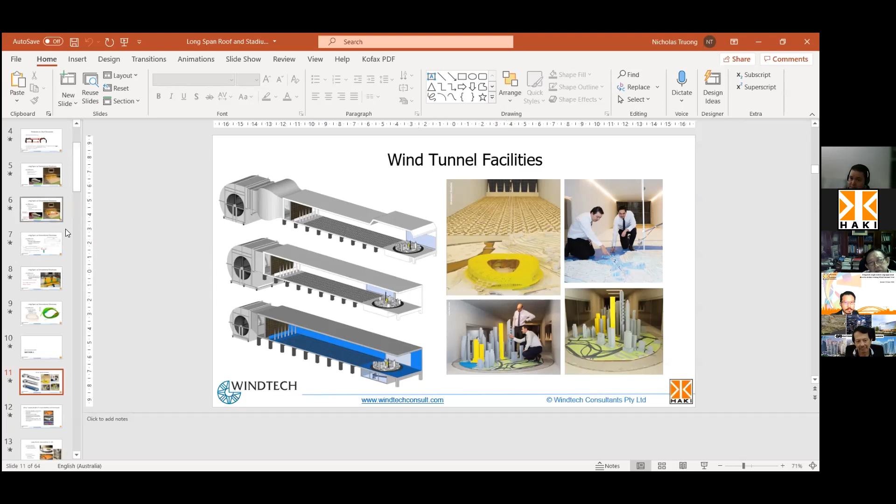The difficulty is that this building here is actually in Hong Kong. In doing that design, we had to estimate a code pressure, but the code covers square buildings. So you end up over designing the building, because we had to treat this like an awning, and it's clearly not an awning. So the answer is it depends on your local standard, but it's quite common just to use the wind tunnel results, mainly because it's very hard to use the code to come up with a good pressure estimate.

Okay. So you're saying that ASCE also has the same requirement, is it? Yes. If you use wind tunnel tests for buildings, so when we do buildings in the US, they have a requirement that the pressures can't be less than 80% of the code pressures, and I think the same for the overall loads. They have a few other clauses in there. I think if you do some other testing, you might be able to go to 70%. But yeah, there's definitely that 80% rule. And as I said, it's not too much of a problem.

But even some buildings that aren't square, that are slightly curved, a lot of buildings have a lot of step-ins and step-outs because they don't want to just build a square box. It can be quite tricky to try and come up with a fair code estimate. And the other thing, I'm not sure if you've worked in the US, but sometimes you have the check engineer, the peer review engineer, and they don't like what you've done too. Okay, yeah. So that can be problematic, right? Yes, that's right.

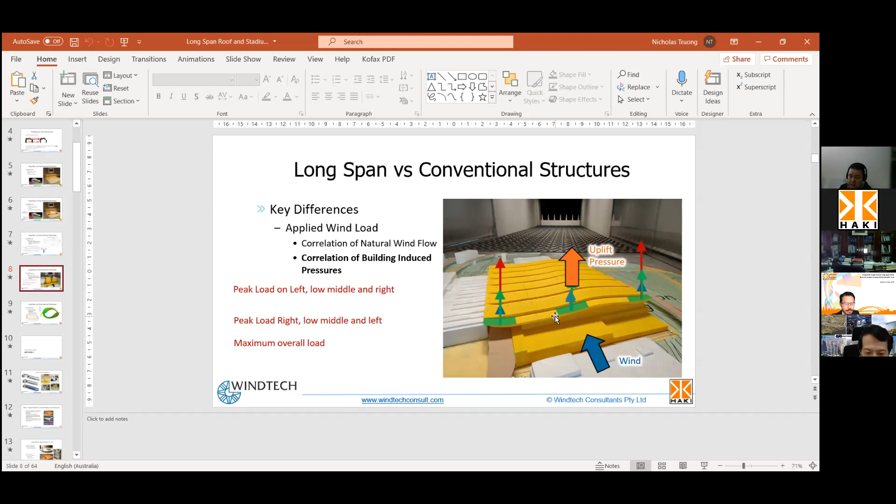Okay. So Dr. Nicholas, based on your experience testing these long span structures, when do you think long span structures need to be tested through a wind tunnel instead of just using wind design code values? Are there any rules of thumb, in terms of span or other structural properties? So going back to what we talked about in the beginning about the key differences, there are really two ways of thinking about this.

Are you worried about designing a structure correctly, or are you wanting to save some money in the design? In terms of designing the structure properly, the time to do the wind tunnel test is when you have difficulty trying to really force the code onto your building shape. In this case here, they would have used what they call a monoslope roof, which is really designed for a small shelter, like a shade structure, and you're using that to design this roof. It was never designed to do this.

So when you're trying to push the envelope of the code too far, that's the first reason why you would use it, from a safety point of view. Also, as I mentioned before, if you have an unusual mode shape, or a structural response which is new and different, that's something the person who designs the code wouldn't be thinking of. I'm involved in the Australian Standards Committee, and when we put provisions in the code, we're thinking about conventional structures, like a cantilever or a simple roof. We're not thinking about these really complicated things.

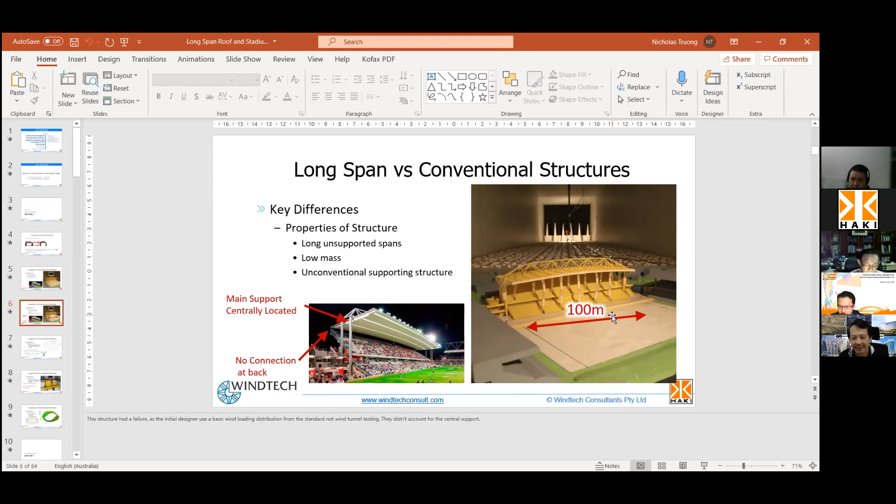Okay, Nicholas, I would like to ask one question regarding high-rise buildings. Yep, sure. What is your opinion on the problems of the SEG Plaza? I'm not sure, I'm not familiar with that, sorry. It's a tall building, about 70 stories, which swayed a couple of times. The one in China. Yeah. Right. Yes. Okay.

I haven't had a look at this, but I did see an article written by Ahsan Kareem. I'm not sure if you know Ahsan Kareem. He is the president of the International Association for Wind Engineering, a professor in the US. I think he was suggesting that it may have been some kind of effect of the top of the building. I think there's a spire on the top, and the effect coming down, which was very interesting because that's the completely opposite way we think about it.

We design spires all the time, and I'm pretty sure I've never considered that the thing might vibrate and it would come down. Beyond that, I haven't really looked at it, but it is very interesting. I would expect that in a few years' time there will be a whole raft of people with different papers and analysis trying to explain what's going on. But if it does turn out to be what Ahsan is saying, then we'd have to really think about how we design these fancy roof features.

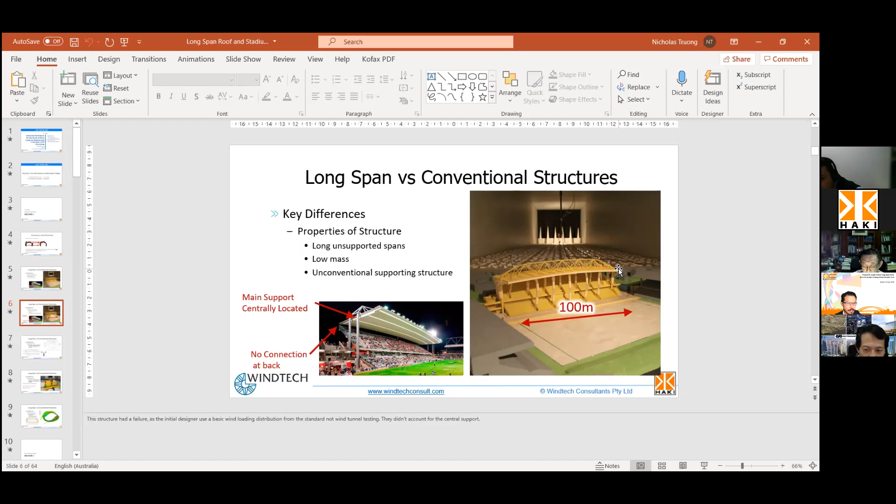So maybe you can also talk a little bit about the process involved with regards to coordination between structural engineer and wind consultant if a wind tunnel test is used. I mean, what sort of information is required, and what sort of output will be provided? Sure.

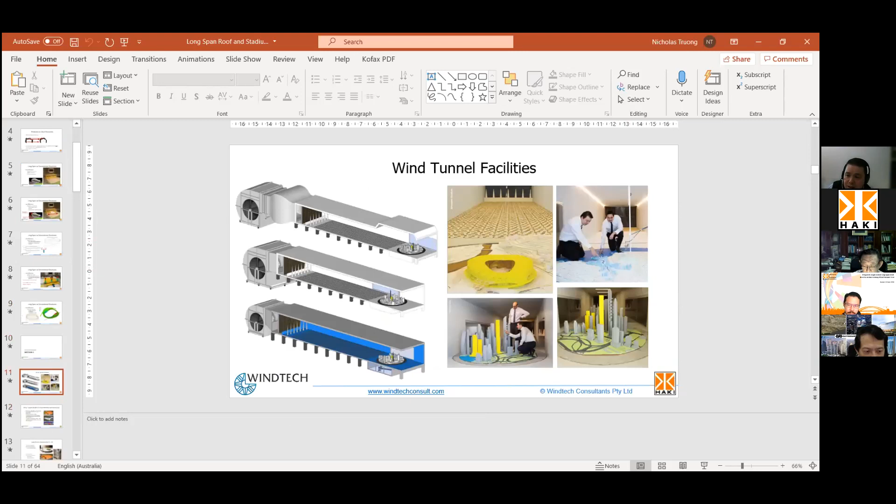Okay, so to start with, we need to build the model. So we would need some architectural drawings of the model. And so these are based on the architectural drawings. That's the first thing. And then we start the process of building the 3D model. The next step is that we like to look at the structural framing.

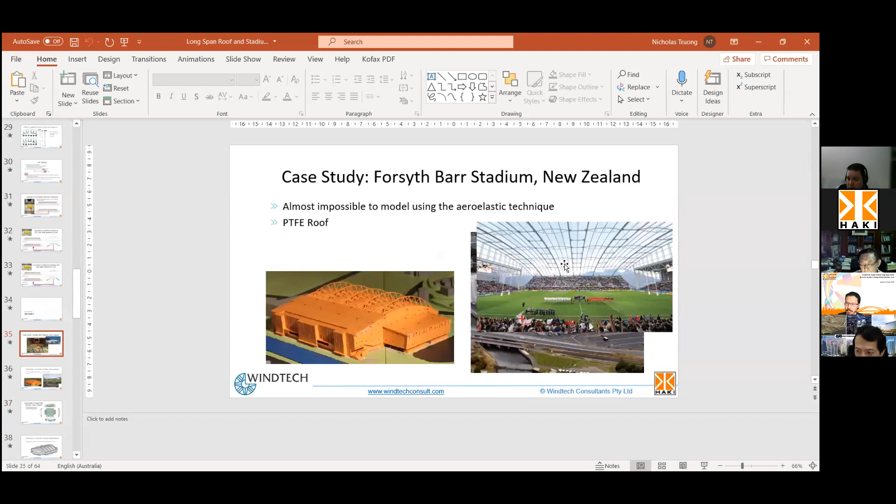And the reason we look at the structural frame is, if we go forward to this example here, we would try and line the panels up with the structural frame. So typically the main beam would be underneath the center of that panel. So I'm assuming this is to scale, I think it is, that these are the main beams and they should sit underneath these panels.

And so that's an important step. And at that point, what we would do is we would do this drawing and we would send it back to the structural engineer. We might have a chat with them about exactly how that lines up. And so this happened with this building we were doing in Korea a few months ago, that they had a lot of trouble with this because

our panels weren't lining up with their trusses the way they wanted to. It was a little bit all over the place, but because they'd moved their structure. So they sent us a structural drawing, we did the panels, and then they changed the structure. Yeah, so there was that issue there.

Then the next step is that if we're going to do the LRC, then we have to go and talk about the influence coefficients. And I went through the influence coefficient method. The most common question we get with the influence coefficients is which load effects to choose. Because I mean, we can do 50 or 60 or 100 load effects. It's not a problem. It's just that we generate a lot more data that needs to be processed.

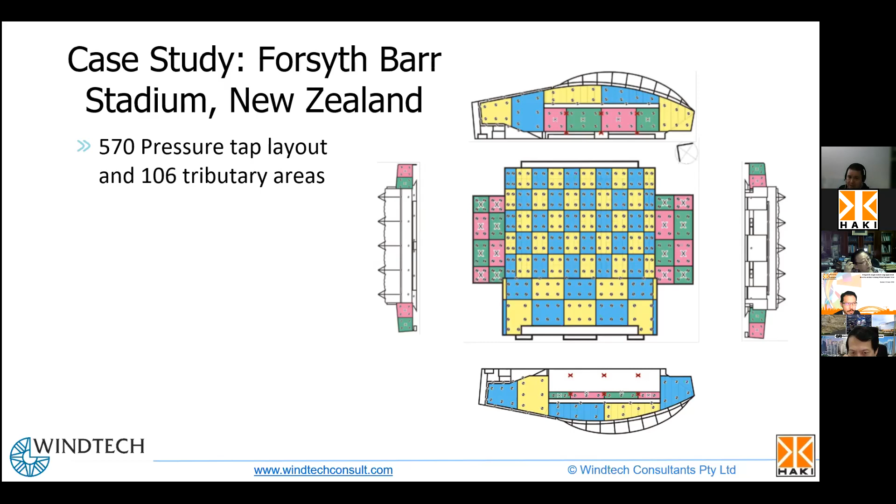I see. Right, but if you have to change the beam significantly, and that results in a large change in the influence coefficient, then as long as the outside form hasn't changed, we can redo the analysis and give you a new set of pressure distributions. But as I said, most of the time it's just changing joints. Okay. Or maybe increasing the diameter or something here. But it's typically not a big... Now, I assume you also need dynamic structural properties.

Yes, that's right. So when we do the resonance analysis, going back to this here, you need to know the mode shape and the equivalent mass of each panel. This also can be a little bit time consuming. So if you have a panel that covers, say, these members in here, then you need to include not just the mass of the PTFE, but the mass of the structure immediately below that. And I believe that has also taken people some time because they don't actually have that to hand, because it's not part of their normal design process, right? To know what that mass is.

How about damping? Sorry, and the damping value we would typically use is a value of say 0.5%, or we can do a variation on that. And that is one other thing in terms of factors of safety, because we only use the structural damping, and typically there would be a little bit of positive aerodynamic damping, especially for a roof structure. So when the roof moves around, there'll be a bit of extra damping caused by its interacting with the air, and that will actually decrease the resonant load slightly. Now, we don't explicitly account for that, but that's another sort of factor of safety.